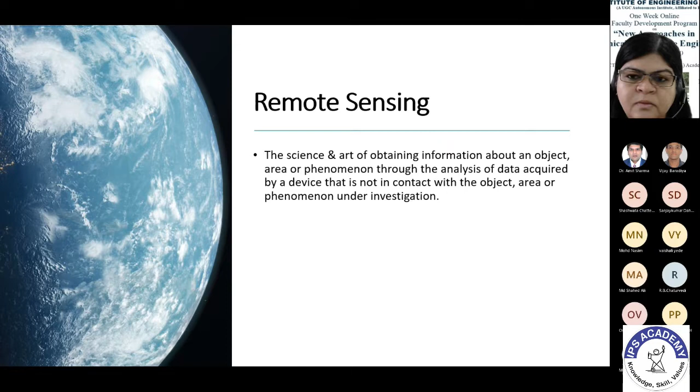Object, like some buildings of interest - the features we are working on. Area, like multiple features in a region, for example a city or an agricultural field. The third is phenomena, which is happening in real time, such as rainfall or some disaster. So you all hearing me and watching these slides - that is also a kind of remote sensing, right?

So now, why remote sensing? It enables us to get information like systematic data collection, information about three dimensions of real objects, repeatability and global coverage, and multiple purpose information. Systematic data - say I want to obtain information for some area, and I send 10 people to collect it.

So 10 people will have different sets of data and 10 different types of error. But with systematic data collection, that sort of error can be removed. Repeatability means taking information over a certain period of time. For global coverage - sometimes a disaster takes place and we are not in a position to physically go to that place, so remote sensing is very helpful there. The same data can also be utilized through different methods for people catering to different applications, so the same information can be used for different applications.

Now next we resort to the remote sensing process. What is the process? How are we able to get the data? First of all, we need to sense some target for which we want information, and we need a source of light, which is the sun, to illuminate it. So it can be the sun or some artificial source of energy. Then we need a sensor to collect and detect the data. So D is our sensor, which is a platform.

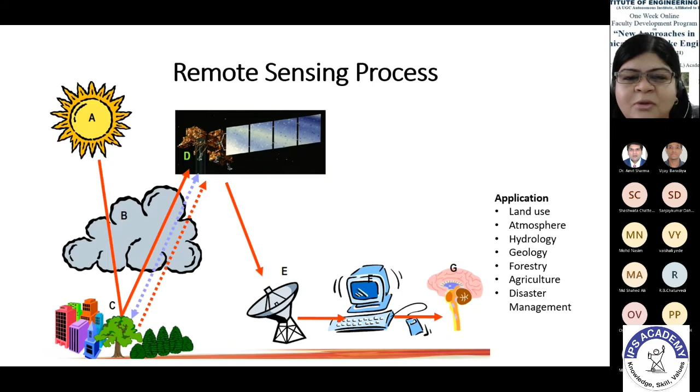Then comes the next term, which is GIS. So GIS, we are all using it. It is a computer-based tool to capture, store, update, analyze, and display all forms of geographically referenced information on Earth. This information is acquired for real life problems. Originally GIS was developed in Canada for farmland revival and development, and then later it was utilized for various other purposes.

So the most commonly used softwares to carry out this work are ArcGIS, which is a licensed software, and then we have QGIS, which is an open source software. So people can use it openly without having any key or access like that.

Then for GIS, we are going to have five basic components: hardware, software, data, methods, and people. So hardware, that is a robust computer system, is a must for smoothly performing all the operations in GIS, and this is the basic requirement to start with the working.

Then we require a software like ArcGIS and QGIS for storing, processing, analyzing, and displaying the data. Then for the data, the final GIS output largely depends upon its availability and quality. The input data for GIS may be in the form of satellite images, scanned maps, survey data, historical records, etc.

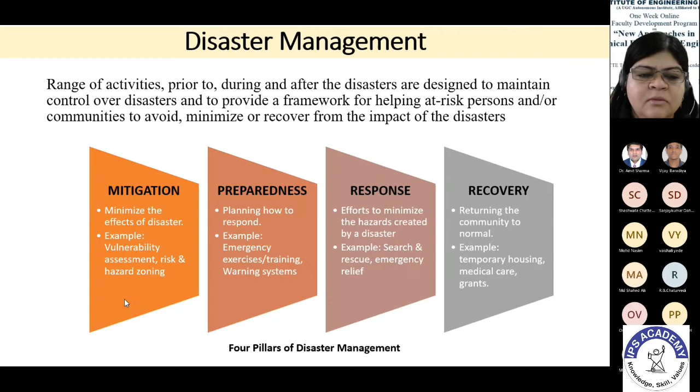Then the fourth pillar is recovery, that is restoring the affected area to its original state, for example by providing temporary housing, medical care, and grants to the people affected by the disaster.

So for disaster management, we require space technology, which provides a platform for observation and information. This information is very useful for taking proper decisions in the event of a disaster, and not just observation, which is more or less spatial, but it also provides satellite-based location, popularly known as GPS. GPS is nothing but a satellite-based location service provided by a group of satellites launched by the US.

Then the third aspect is communication, which in the event of disaster, terrestrial communications are affected first. So in that case, to understand the extent and location of disaster, as well as getting ground-based information for prioritization, communication during the period of disaster is mostly provided by this space technology.

In a disaster cycle, as we have already discussed the four pillars of disaster management, there is a cycle in disaster management. First, information and observation is provided by satellite-based information, which observes the Earth, and satellite-based communication from the ground, to assess the extent of the disaster and the damage caused.

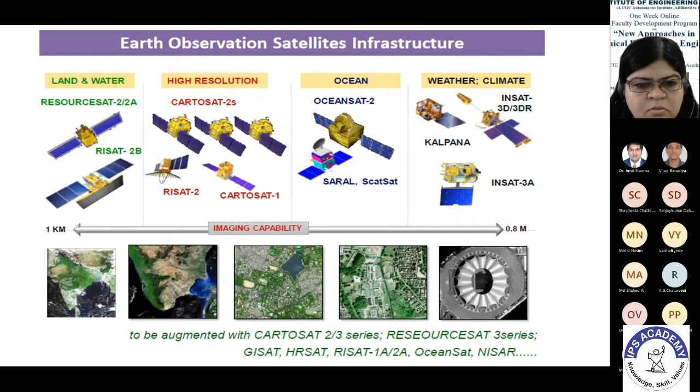Now, for information assessment and data collection, we have various portals in India which provide datasets in the form of satellite imagery or maps. We have Bhuvan, NDEM, MOSDAC, and IMD.

Bhuvan allows us to explore a set of map-based content prepared by ISRO. Then NDEM, that is the National Database for Emergency Management of Disaster. It is a portal provided by ISRO along with central and state departments, and it provides products and services for better management of disaster.

Then MOSDAC is the Meteorological and Oceanographic Satellite Data Archival Center, and it is the data repository for missions of ISRO and the Government of India dealing with meteorology, oceanography and tropical water cycles. Then IMD, we are all aware of, constantly looking at the weather and temperature every day. It's a very basic site that everyone follows, which is the agency of the Ministry of Earth Sciences and Government of India, responsible for weather forecasting.

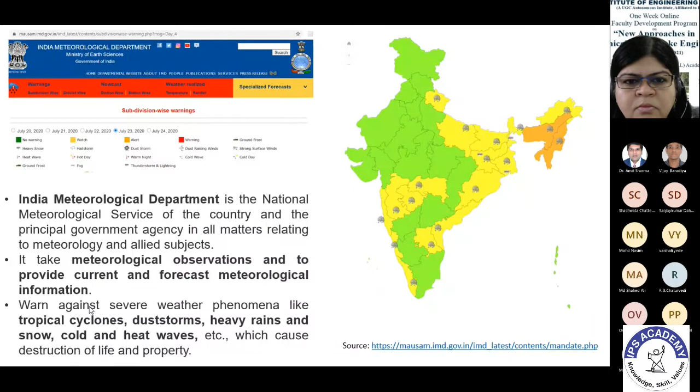This is the IMD website of India, for current and forecasting meteorological information. This is the cyclone warning and cyclone forecasting, the early warning system by IMD. We have tackled various cyclone problems like Amphan and Nisarga through this technology.

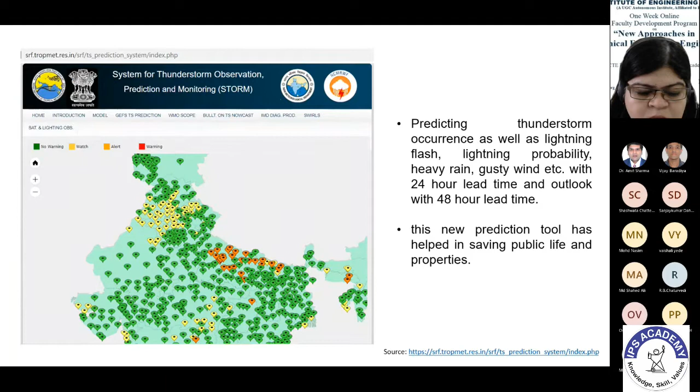Then we have STORM, which is the system of thunderstorm observation, predicting and monitoring for lightning, heavy rain, gusty winds, etc., within a 24-hour lead time. Then for drought we have DEWS.

And for forest fire, which is very prominent in hilly regions, we have a forest fire reporting mobile app developed by ISRO, which will prove to be an effective tool for forest management, where satellites validate forest fire occurrence and location accurately, helping the department take appropriate action in controlling the fires.

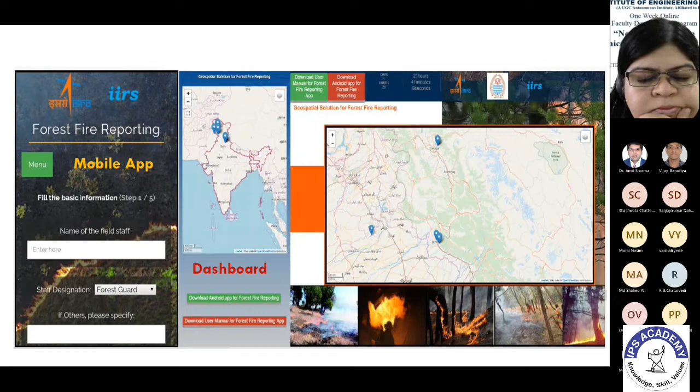Then we are all aware of drones. Drones are also being used for collecting information and monitoring, for example in containment zones during the times of COVID. So these are some examples of the application of remote sensing and GIS in managing disaster.

So, concluding the role of remote sensing and GIS in disaster management, the first point is hazard mapping. Hazard maps can be created for various natural and man-made hazards like floods, earthquakes, cyclones, forest fires, etc.

Then it can map the affected locations and compare the data to historical information to assess the overall damage. While remote sensing aids in map preparation, GIS can be used for the storage of digitized maps, their visualization and analysis. It helps in all the stages of disaster management, as we have seen with some examples, effectively improving the workflow in all phases of disaster management.

So this was all for the various tools and techniques we are using for disaster management. Next, we are going to come upon the topic of landslides. Landslide is one of the most damaging and life-threatening hazards which affects most of the hilly regions worldwide.

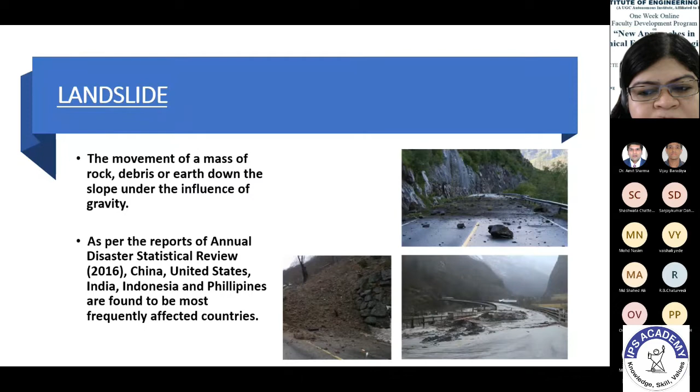According to a study conducted by Froude and Petley, from 2004 to 16, there are individual landslide events you can see, and from that study it was concluded that the majority of landslides were triggered by rainfall, that is 79%, of which India is contributing 16% in the global dataset. You can see that in India there are so many landslide events that have happened from 2004 to 2016.

From the study it was also concluded that 28% is construction-triggered landslide events, about 12% is landslide events triggered by mining, and 30% of landslide events are due to construction activities along the road. So construction activities most prominently trigger landslides, whether it is the construction of roads, residential buildings, or other types of construction.

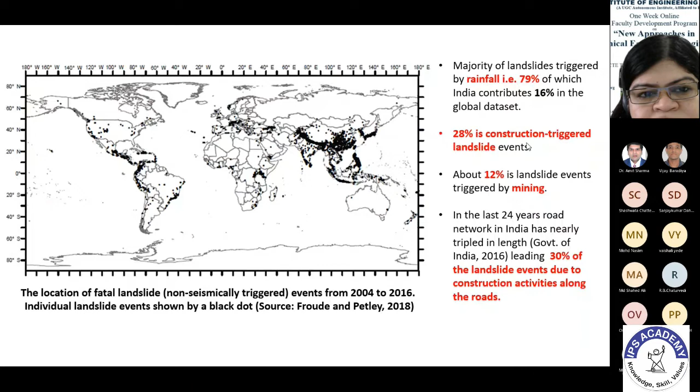This landslide case study has been presented on which two objectives have been fulfilled: the study of landslide susceptibility zonation and the study of physical vulnerability. The study area on which the study has been conducted is Chamoli district, which is in the Gopeshwar township, and Chamoli is the district headquarters.

Gopeshwar Township has been the district headquarters of Chamoli since 1960. Since it shares the international boundary with China, it is important from a strategic point of view.

This is the map of Gopeshwar Township, obtained from Nagar Palika Parishad Chamoli 2016. According to the municipality, Gopeshwar Township has been divided into 11 different wards.

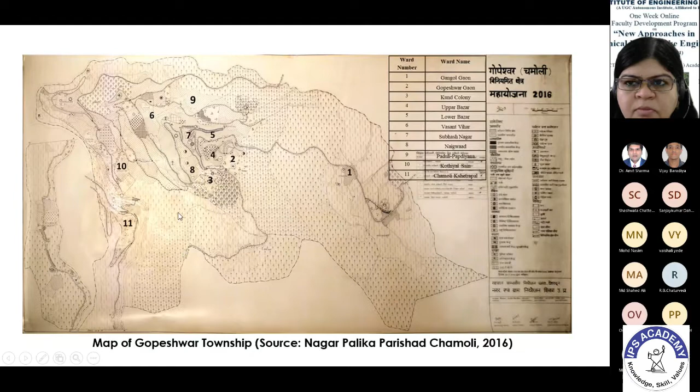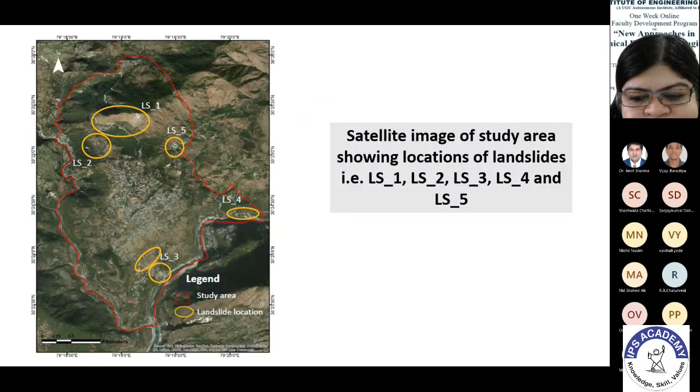This is the satellite image of the study area, which has been collected from GIS, and from there we observed that there are 5 landslides affecting the area. We have given each one a notation, like LS1, 2, 3, 4, and 5. So in the study area we are affected by these 5 landslides.

This is a field comparison of images acquired from the field survey, on the left, and the base map ArcGIS, on the right. First we collected data sitting in our offices from Google Earth images and ArcGIS maps.

We identified these landslides, and then for ground truthing we went to the field where we found that these things are true. So this is just a comparison to show the data acquired plus the ground truth condition.

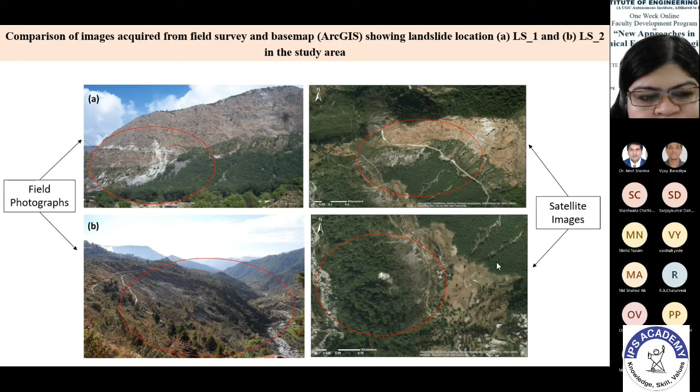So the first study we did was the landslide susceptibility zonation. It is done in order to acquire prior information on the probability of landslide occurrence in hilly areas, and generating the landslide susceptibility zonation maps, which is necessary. This is basically the first objective in all landslide studies. Landslide susceptibility maps divide the landslide prone regions into various levels of susceptibility zones.

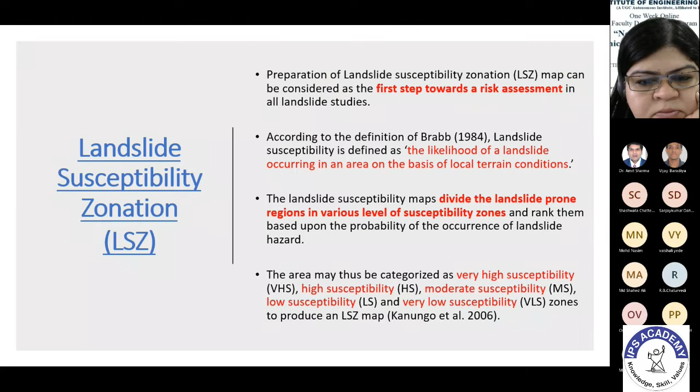Susceptibility is the likelihood of landslide occurring in an area based on local terrain conditions. While dividing these areas into different categories, like very high susceptibility, moderate susceptibility, low and very low susceptibility, we divide the regions to know how susceptible, how prone the region is to landslide.

There are different methods to carry out this landslide approach, broadly classified as qualitative and quantitative. Under qualitative, there are different methods like distribution analysis, geomorphic analysis, map combination. And quantitative, which most people are using now, like AHP, fuzzy, machine learning, ANN, information value, weighted overlay. These are all the quantitative methods.

A lot of study has already been carried out on landslide. So in my study, this is the flow diagram of the steps which have been followed for the landslide susceptibility zonation, and in this, information value approach has been used.

For the input data, I have taken data from published literature, field data, Cartodem, which is the satellite image, Google Earth, base map imagery, and ArcMap. Then from these input data, the different thematic data layers corresponding to different factors for landslide occurrence have been prepared using GIS and field data, like slope, aspect, drainage buffer, TWI. After collection of this data, the data is being integrated using the information value technique.

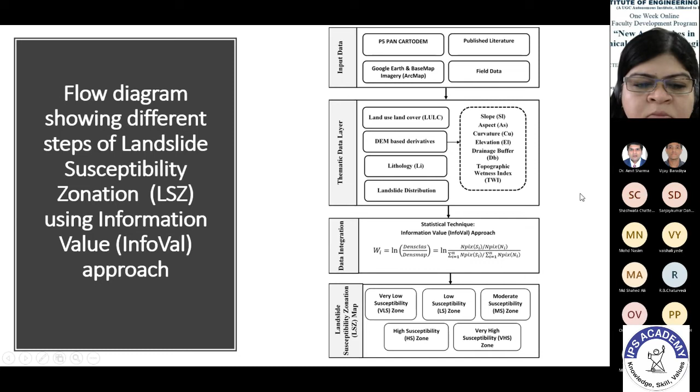Then we have slope, which is the angle formed between any part of the earth's surface and the horizontal datum. It was observed that the slope category of 25 to 35 degrees has the highest incidence of landslide.

Then we have the aspect layer, which is the direction of maximum slope of any location on the earth's surface, and it is related to the distribution and density of vegetation on the mountainous slope. In this study, it was observed that the southwest aspect category had the higher percentage of landslide occurrence.

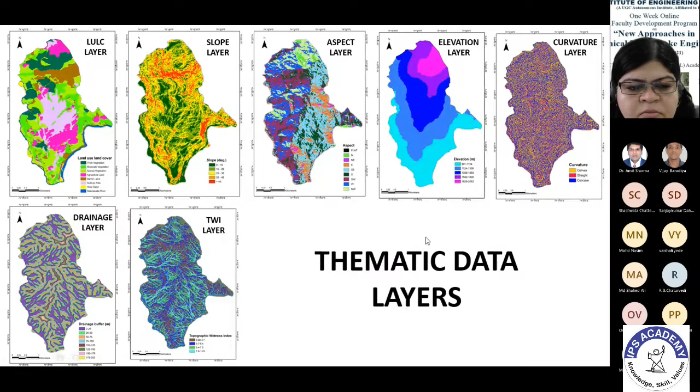This layer is prepared using GIS, and all the layers have been overlaid and numerically added, and the success rate curve has been presented here.

This is the success rate curve, defined as the percentage of landslide occurrence in any susceptible zone. Five representative factors are shown, at which success rate curves have been prepared. For m equal to 1, the best success rate curve was achieved, and for the first 10% area in the very high susceptible zone, m equal to 1 has the highest success rate, as I already told you.

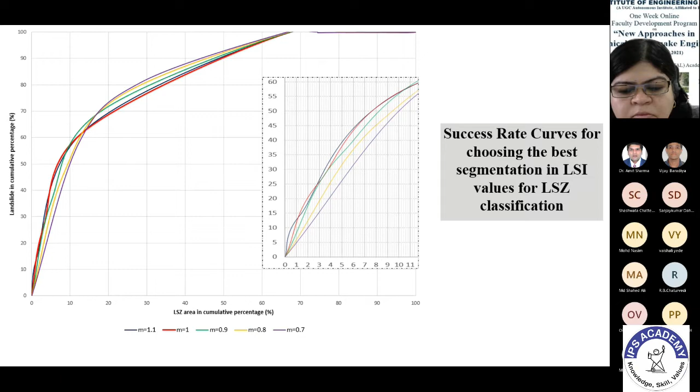The area under the curve is achieved graphically. For m equal to 1, the success rate is 97.6%. So we have prepared this landslide susceptibility zonation map at success for m equal to 1.

This is the final LSZ map, classified into 5 different layers: very low, low, moderate, high, and very high susceptibility. Visual inspection of the LSZ map suggests that all 5 zones are distributed all over the study area, and this shows the different percentages of landslides.

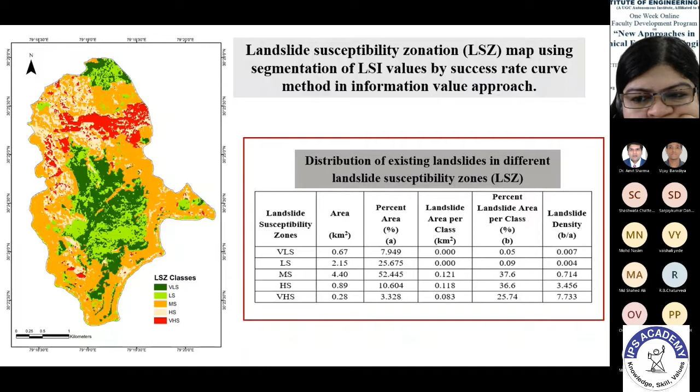It can be stated that 13.9% of high and very high susceptible areas together contain 62.34% of the existing landslide areas. So in high and very high susceptible areas, we have approximately 62% of the landslides. This is the summary which I have already discussed.

Next we have physical vulnerability. First we need to know what vulnerability is.

From a natural and engineering science perspective, vulnerability is defined as the degree of loss in terms of the percentage of structural damage to a given element or set of elements subjected to a landslide event of a given type and intensity. It is expressed on a scale of 0 to 1, where 0 denotes no loss and 1 denotes total loss.

As per UNDP, the United Nations Development Program, 2004, vulnerability has been classified into 4 categories: physical vulnerability, environmental vulnerability, social vulnerability, and economic vulnerability.

Physical vulnerability is the loss due to damage of physical infrastructure and buildings, which we have conducted in this study. Environmental vulnerability is the loss of natural resources and damage like water, land, etc. Social vulnerability is the loss of population and social structure. Economic vulnerability is the effect on the economic condition.

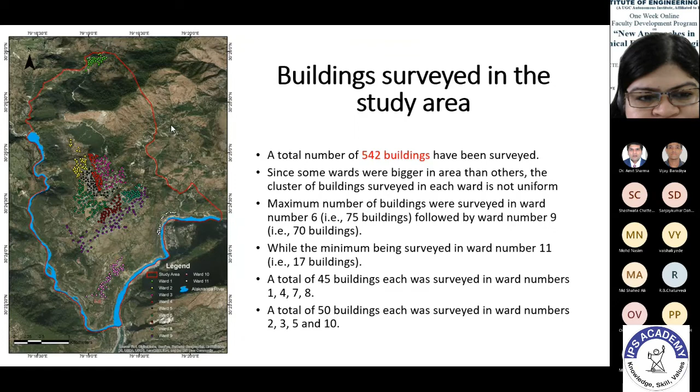We have categorized each aspect into different categories, like surrounding wall as strong, high wall, medium, or low. Then structural typology - stone masonry, reinforced, or mixed kind of structure. Then roof design type, number of floors, and vertical configuration - whether the building is regular or irregular. Then horizontal configuration, again with regularity or irregularity.

Then the presence of windows and doors, which should be greater than or equal to 1 meter, as per the Indian code. Then distance between two houses, building position from steep slope - whether it is less than 10 meters, greater than 10 meters, or on the steep slope.

Then the surrounding vegetation - barren, cultivated, or forest - and the quality of construction, like bulging of walls, spalling of concrete, and whether the reinforcement is exposed or there is honeycombing in the structure.

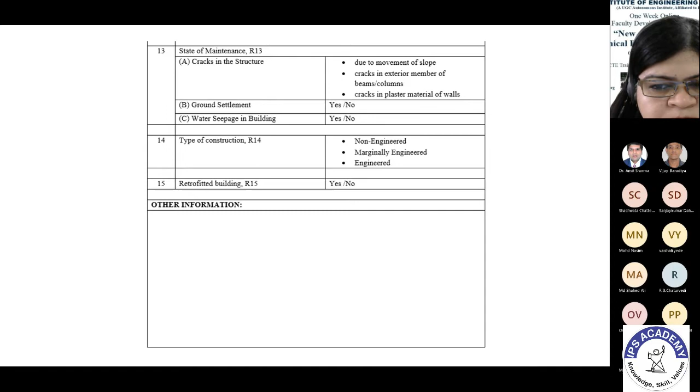Then other indicators are cracks in the structure due to movement of slope, ground settlement - whether it is present or not, water seepage present in the building or not, type of construction - whether engineered, non-engineered, or marginally engineered - and the last one is retrofitted building, meaning once they were affected by some disaster like earthquake or landslide, and retrofitting has been done on that building. So the 15th indicator is the retrofitting.

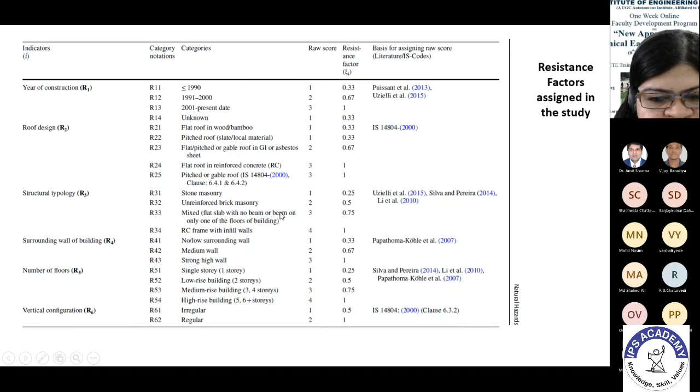All these indicators have been assigned a resistance score, resistance rating. These are all the different resistance factors assigned to all the indicators, based on either literature or using the Indian Standard Code like IS 14804-2000. So these indicators have been assigned factors.

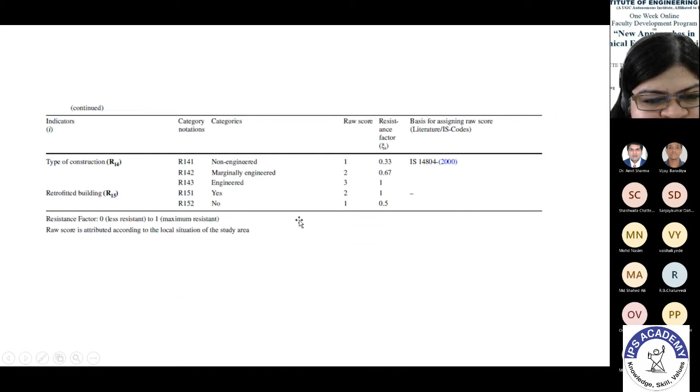After collection of this data in the building vulnerability assessment form, these scores are assigned, and then calculated using this empirical formula, and categorized as low, moderate...

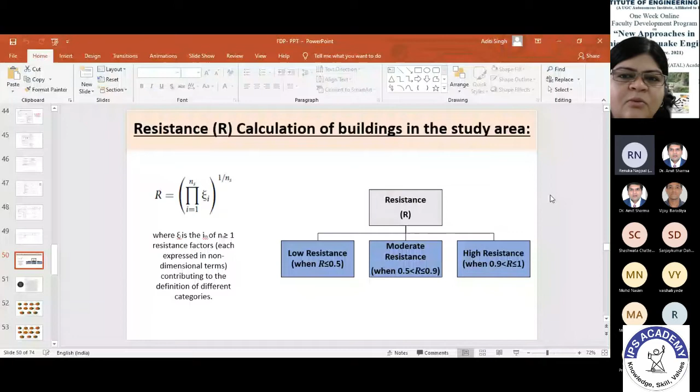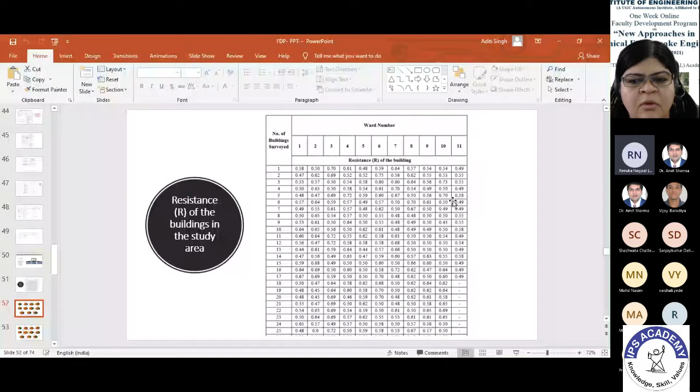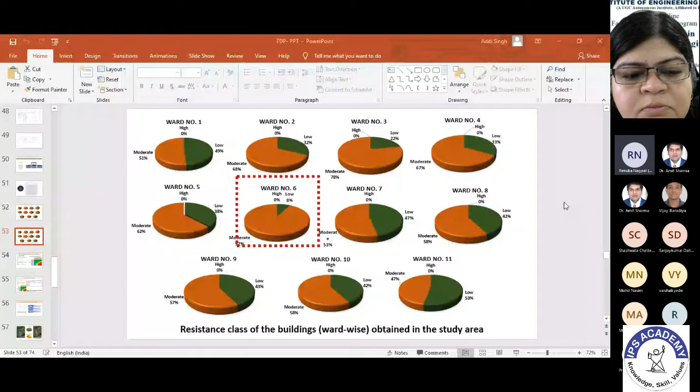Then, the overview of the methodology for scenario-based debris flow intensity. We are going to have the intensity assessment. For Indian Himalayas, landslide intensity has not been reported so far. Therefore, in this study, a methodology has been proposed to assess the landslide intensity.

Scenario-based intensity is assessed based on the debris flow type of potential failure, and intensity has been calculated using the landslide velocity scale provided by Cruden and Varnes, and landslide volume for Indian Himalayas given by Sarkar sir. So using volume and velocity, we have developed a matrix to find out the intensity.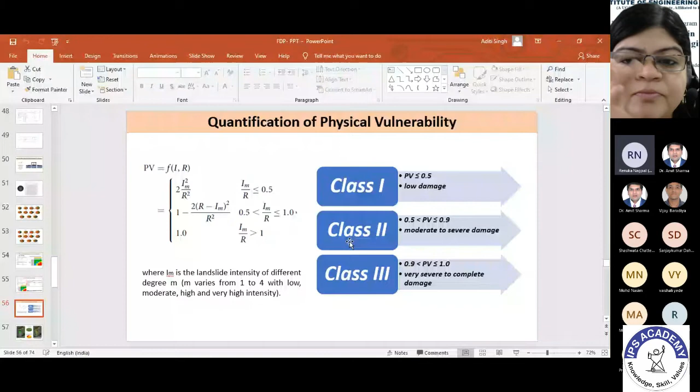So for scenario-based vulnerability, we found that when exposed to low intensity, all the buildings are safe. Then for physical vulnerability at moderate intensity, we found that 64% of buildings belong to class 2 and 36% of buildings belong to class 3.

Then when we exposed the buildings to high and very high intensity, what we found is all the buildings belong to physical vulnerability class 3 - all the buildings are in the mode of very severe to complete damage. That means this study area cannot sustain this much intensity. So through this, we consider this to be a landslide disaster, and we will be severely affected by landslides of very high and high intensity.

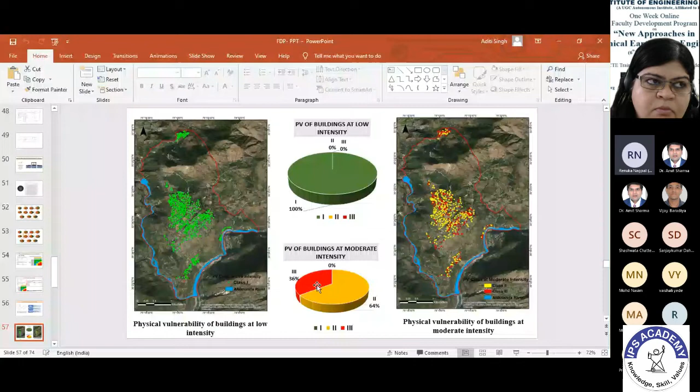So this was for the scenario-based intensity. Now talking about the site-specific vulnerability, we have focused on a single landslide which is affected by debris flow. This is the field photograph, and this is the Google Earth image shown in blue.

Here the lines you can see are the drainage pattern when there is rainfall. This is the drainage zone being followed, and all this is going to the Alaknanda River, which is the adjoining river of this township. This is the Google Earth image, as you can see.

This again is the landslide, this is the Alaknanda River, and these are the different buildings which have been constructed near the landslide.

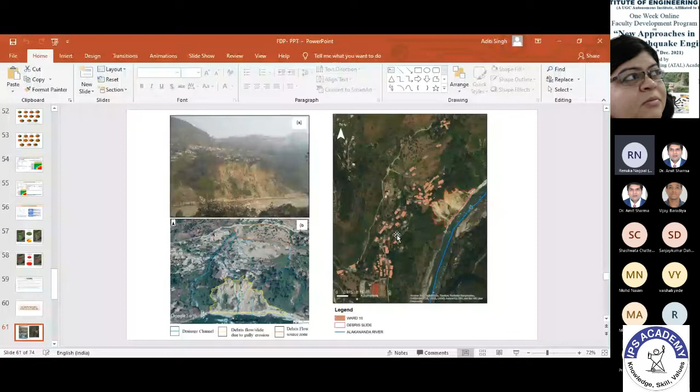So, a comparison of this image has been presented through Google Earth. On 28th May you can see there is no landslide here. On 25th Feb, a small bit of landslide is visible, with dense vegetation here. Then in 2014 and in 2017, again there is sparse vegetation and more population.

This is because of the 2013 flash floods which happened. So this triggered it - on 28th May there was no flash flood, and after that the flash flood came, the Kedarnath flash flood, and this was triggered, as you can see.

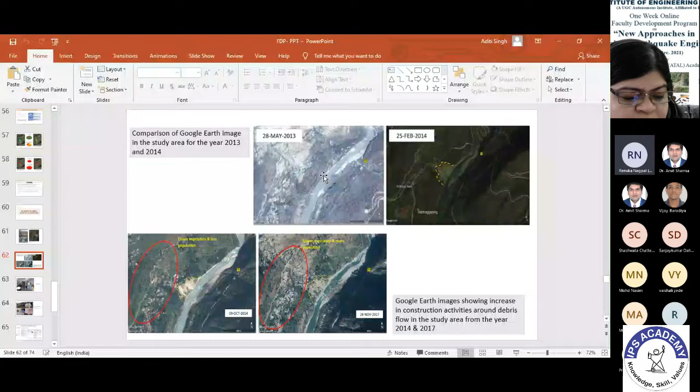So stability is not there, and this portion of the ground is unstable, and it is slowly moving down to the Alaknanda River. So for this, we have calculated the velocity.

Velocity was calculated using the area and the thickness of the landslide, and using an empirical formula. Using that we have used this matrix, and intensity was given.

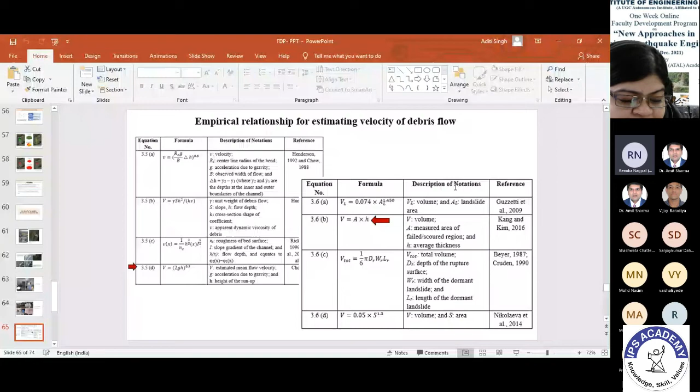Then this you can see the field photograph. This is the landslide. Another adjoining landslide above that is also being triggered, and these are the different buildings which are vulnerable.

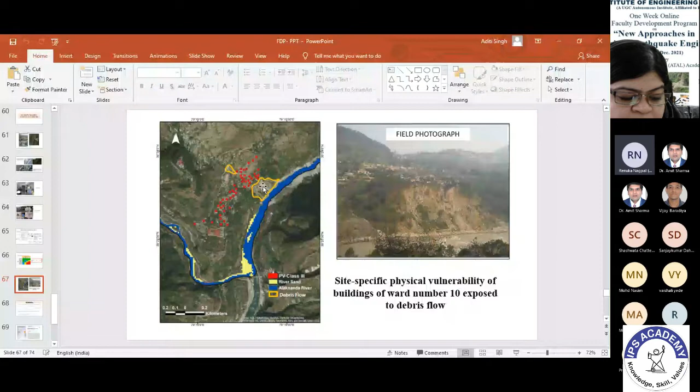From this, we can conclude that one of the major advantages of the methodology is its flexibility. The practical experience achieved through the case study shows that the methodology is user-friendly and can be directly implemented with the knowledge on landslide intensity and resistance ability of individual buildings in the area. Even if the data on landslide intensity is not available, the vulnerability of the building can still be assessed.

Such assessment can be extensively used by engineers and scientists to facilitate appropriate protective measures to both the buildings and the landslides, to increase their resistance and decrease the intensity respectively in a particular area.

This will help buildings and also property, and such assessment will help with construction guidelines. It will help in preparing construction guidelines specific to a particular region, which are presently lacking in the country.

So these are the different publications related to this work. One is in Environment, Development and Sustainability, with the title 'An Integrated Approach for Landslide Susceptibility, Vulnerability and Risk Assessment of Building Infrastructures in Hilly Regions of India.'

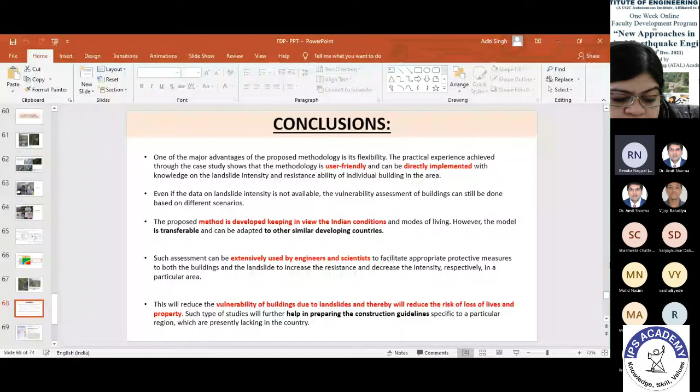The first overview of this paper on recent developments was presented in WLF, World Landslide Forum. Then one paper is related to the site-specific vulnerability assessment of buildings exposed to debris flow.

So these are all the different publications which are related to this work. That is all from my end. Thank you so much.

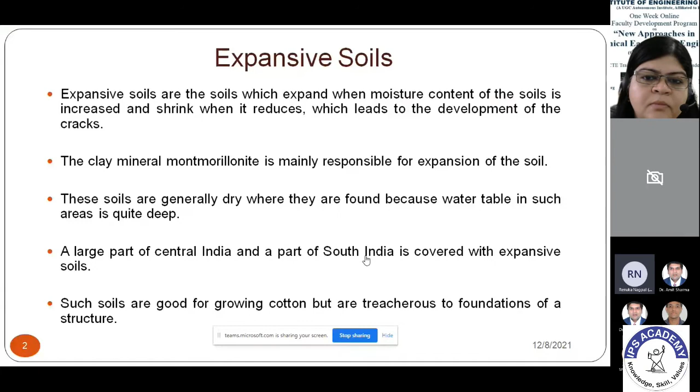We cannot say this soil is always a problem-causing one. For growing cotton, these soils have good possibility, and generally in these parts of India we grow cotton. But these are very harmful, or precarious, for the foundation of a structure. As you can see, this is one of the expansive soils found in the central region of India.

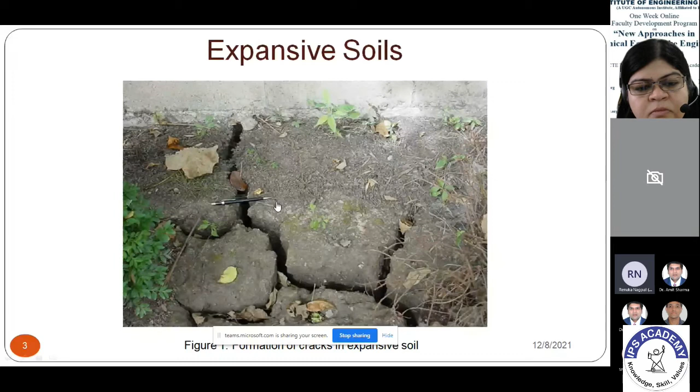There is a pen shown for demonstration purpose. As you can see, when these soils get dry, the pen shows the cracks in such soils. The width of the crack can go up to 10 to 15 centimeters - it can go as high as 15 centimeters, which is quite a large number.

The depth of this crack can go up to approximately 0.5 meters to 2 meters as well. So you can imagine, if any foundation is laid on such kind of expansive soil, and cracks appear in this type of soil, that building will lead to cracks or can also collapse because it will lose its shear strength. The soil will lose its strength, and this will ultimately lead to deformation or damages to the building.

So there is an active zone we talk about in these kinds of expansive soils. The active zone is the zone where, when moisture enters this kind of soil, there is a periodic change which happens.

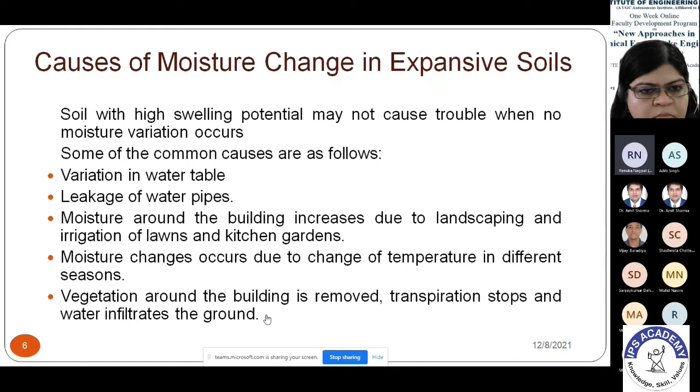So let us discuss, if we have already made a building on this type of soil, what can happen in that case?

If proper measures are not taken while construction of the building, meaning soil modification or other things have not been taken care of, then expansive soil is there. When water seeps into the soil, that will cause the expansion of the soil, and it will try to push the floor or slab which is laid under. That will ultimately lead to cracking.

As you can see in this picture, this is a foundation that we have made, but there is a wall which was constructed on top of this foundation. When water is added in such soils, the soil tries to expand, and while expanding, the uplift load was applied on the floor, which leads to deformation, or you can say cracking in the wall. Ultimately the floor will move in the upward direction, and this will lead to cracks in the walls.

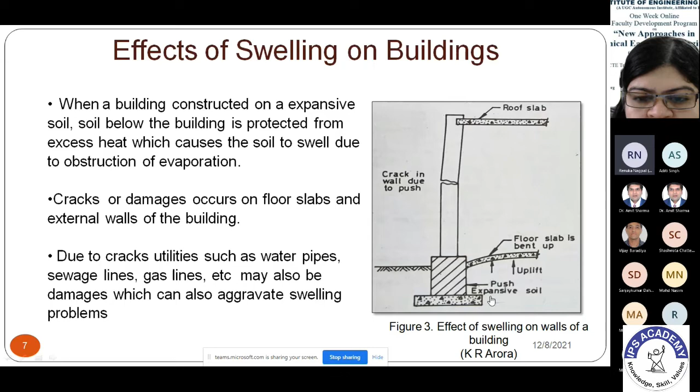So one of the popularly known expansive soils is black cotton soil. In India, it is found in the Chhattisgarh region or Madhya Pradesh region, mostly Madhya Pradesh and Maharashtra. These soils have the Montmorillonite mineral, which causes such expansion of the soils.

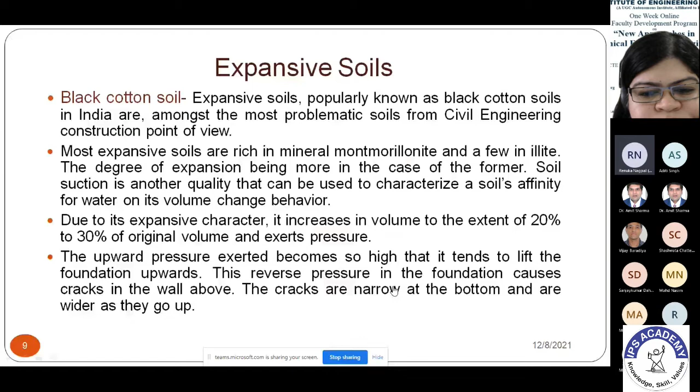So ultimately, as we have discussed, these soils are basically sticky plastic clays which are highly expansive and derived either from residual weathering of volcanic rocks or weathering of fine-grained transported soil particles, which are found in valleys and river banks. Obviously, these soils have great affinity towards moisture and are characterized by shrinking and swelling.

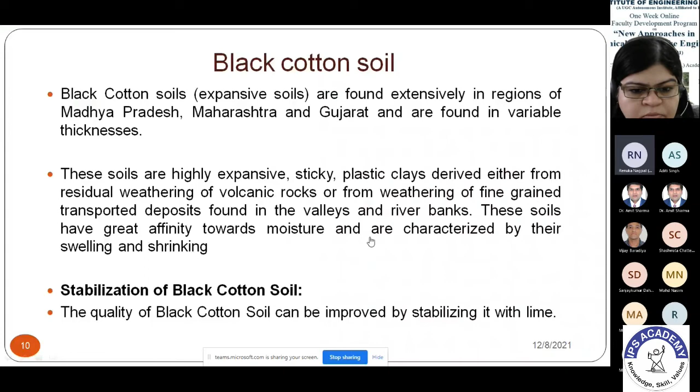Next, we are going to discuss the preventive measures for expansive soil. So what happens if we are having expansive soil and want to make a structure on such soil? First of all, we can go for the replacement of the expansive soil. But as you can see, in such regions there is plenty of expansive soil available, but there can be scarcity of granular soil or other soils which we want to use in that area. So it can sometimes be uneconomical if we go for a larger depth. It will be economical if we go for a small depth only, and otherwise we have to take other measures.

So if the soil is at shallow depth, we have to remove it and replace this soil with granular soil or any other kind of soil which does not show shrinkage or swelling properties. But remember, it is always uneconomical to replace the whole soil. If we are making a superstructure like a 20-story building, we cannot just remove the top 3-4 feet of this expansive soil. We have to go in the deeper direction. So in that case, other preventive measures are also taken, which we will discuss in the further slides.

Another method is modification of the expansive soil, so stabilization of soil is there. Stabilization means adding lime. What we do is add lime into the soil and mix it properly, and then lay this type of soil. Because lime has cementitious properties and binding properties, it will not allow the soil to shrink or expand as it would without lime. So this method is known as stabilization of soil using lime.

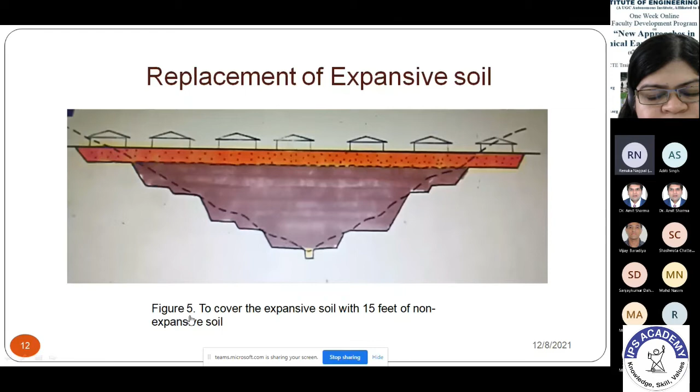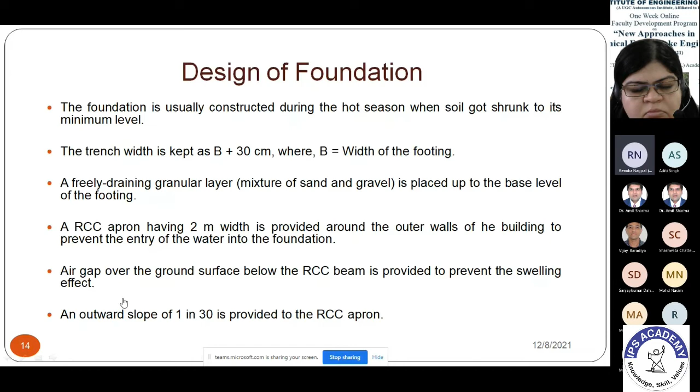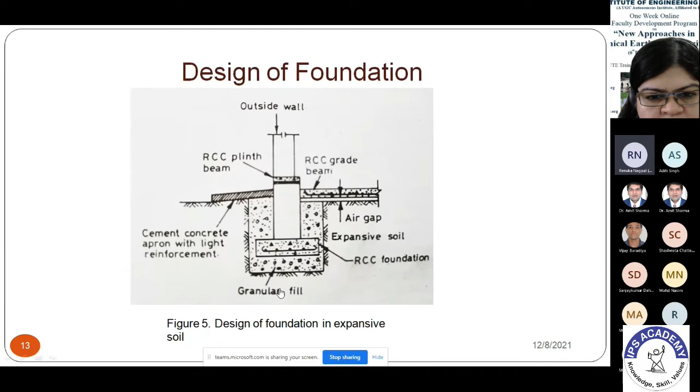So RCC apron having 2 meter width is provided on the outer wall of the building to prevent the entry of water into the foundation. An air gap over the ground surface below the RCC beam is also provided to prevent the swelling effect. We provide a slope of 1 in 30, so that in any rainy season, the slope will lead the water away from this side, and it will not go beneath this foundation. So this is the reason we also provide an outward slope in the RCC apron.

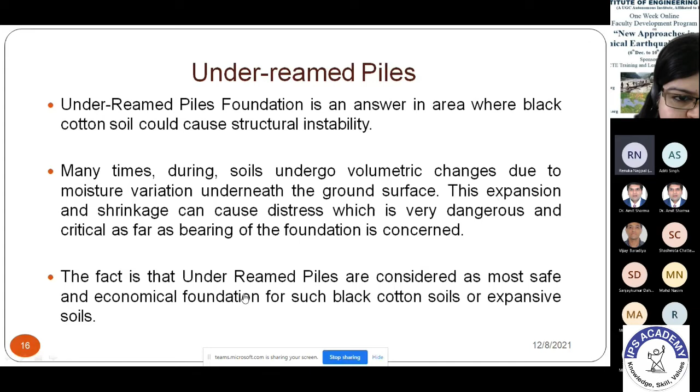First we make a bore, and using the auger we remove the expansive or black cotton soil which is inside. As the auger rotates, it loosens the soil and also removes it. Then we insert the reinforcement and provide the concrete layer.

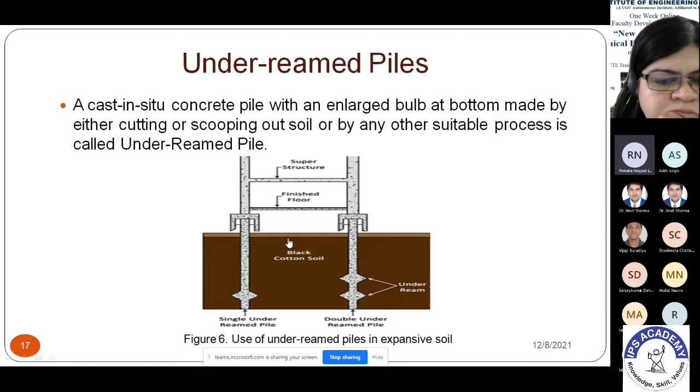There are some provisions and different criteria for using under-reamed piles. As you can see, this picture is taken from the IS code. It is written that we provide a bulb, and the diameter of the bulb is actually 2.5 times the pile diameter, B. There is reinforcement which is already lowered down, and then concreting and addition of concrete occurs, and the pile is formed in that way.

There are a few things we have to note down. First is the diameter, how much will be the diameter of the bulb, and what is the center-to-center spacing we have to provide in these under-reamed piles from one bulb to another. It should be at least 1.5 times the diameter of the bulb itself.

Where we are going to provide the bulb, it is also specified that it should be at least 2B1, where B1 is the diameter of the bulb. For example, if it is 500 mm, we have to go for at least 2B1 minimum, or 1750 mm for expansive soils. These are the things we have to take care of.

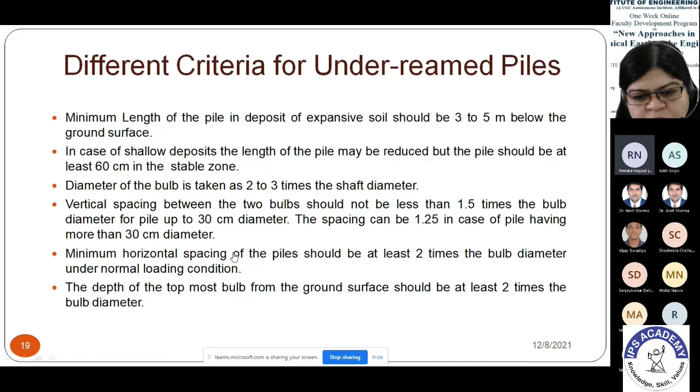So what are the uses of these piles? To avoid the undesirable effect of seasonal moisture changes in expansive soils, to reach hard strata, and to obtain adequate capacity against downward, uplift, and lateral loads and moments. Uplift load is due to swelling of the soil. Lateral load occurs sometimes in high-rise buildings due to the application of wind. When earthquakes occur, lateral forces are also applied. These under-reamed piles can easily take such loads when provided in any foundation.

So, to take the foundation below the scour level. If any building is prone to scouring, we can provide these piles so that the scour level effect can be avoided, and the foundation should be provided below the scour level. Under-reamed piles should be used under conditions where vibration and noise are caused during construction of the pile; this is to be avoided in such cases.

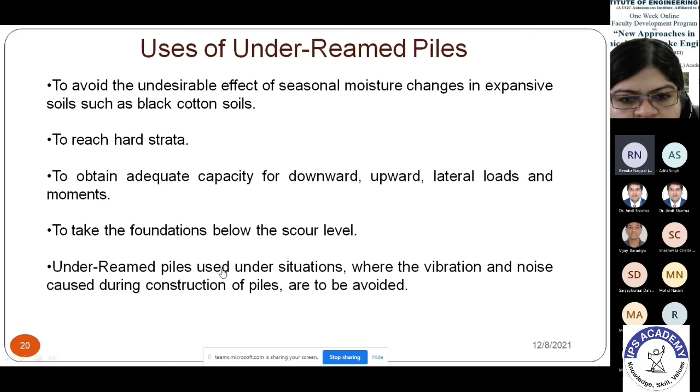So the first portion of the presentation is over, which was expansive soil. Now the second portion of our presentation is collapsible soils. So let us discuss something about collapsible soil. Please excuse me for a second.

Okay, so let's discuss collapsible soils. What are collapsible soils and where are they generally found?

According to Sultan 1969, collapsible soil is soil which undergoes an appreciable amount of volume change upon wetting. This soil does not have shrinking properties, but when we add water and it reaches saturation level, an appreciable amount of volume change occurs in this type of soil.

Either we fully saturate or wet the soil, or it happens by load application. Up to a particular point it can take load, but if we apply more load on these type of soils, a sudden collapse of the soil structure takes place. So there are two major reasons: saturation or wetting of the soil, and load application, or a combination of both.

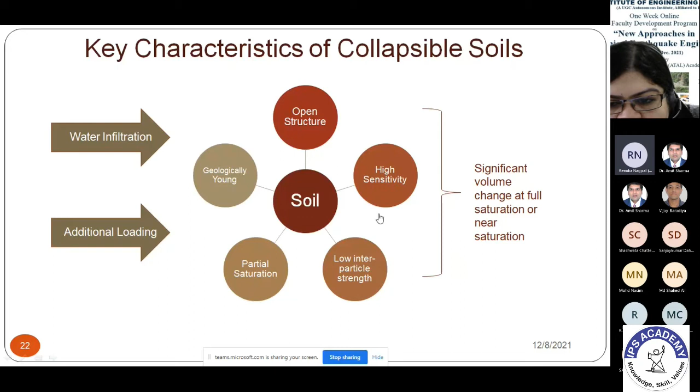There is significant volume change at full saturation or near saturation level. When it is fully saturated or any saturation level is reached, significant volume change will occur. This is the family of collapsible soil.

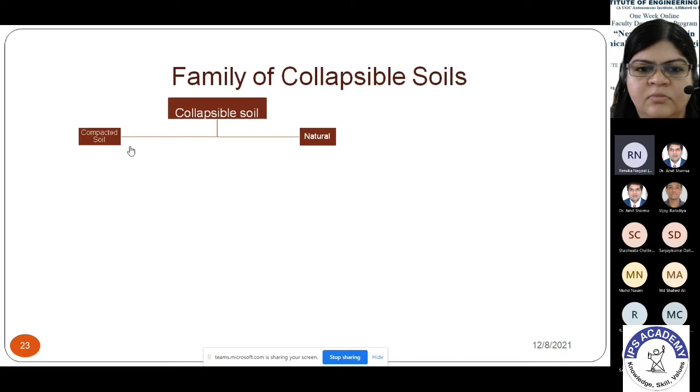We have to classify these collapsible soils. First is compacted soil, another is natural soil. We don't have any problem with compacted soil; it will be found only in glacier regions, so it will not get transported. The problem starts with natural soil.

Natural soil can be further classified into residual soil, sediments, and slide structures. Residual soils are formed by weathering and decomposition of rocks and are not transported from their original place, while sediments get transported from their natural state.

Slide structure is basically the sliding of the structure due to gravity force acting on it. These soils are formed due to the sliding of rock mass at the glacier level, where gravity action is the predominant factor.

Let us discuss sediments. They can be transported either by water or by air, and as just stated, major weathering occurs due to gravity action in this process.

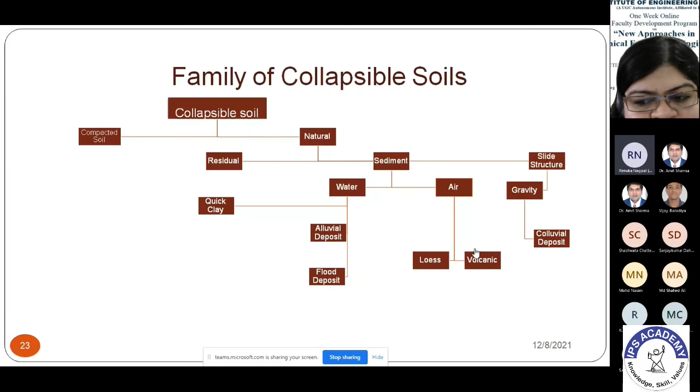Let us discuss alluvial soils. Alluvial type collapsible soils are mainly formed by flash floods or mud flows, which come from huge precipitation at irregular intervals. When this mud flow or debris flow occurs, these soils get transported and deposited in such areas.

These soils are loose and metastable. I'll discuss this metastable condition - it means the soil is actually in a stable condition for a small period of time, until we add water or apply any load on that type of soil. That state is known as the metastable state.

It is formed in a loose state, where from one soil particle to another there is actually a gap, so it is held together by binding bonds. We will discuss this in the upcoming slides.

Loose and metastable states are induced due to particles that are transported and deposited suddenly or locally. Alluvial deposits are poorly graded and may contain a considerable amount of clay, which plays an important role in binding these particles in the dry state.

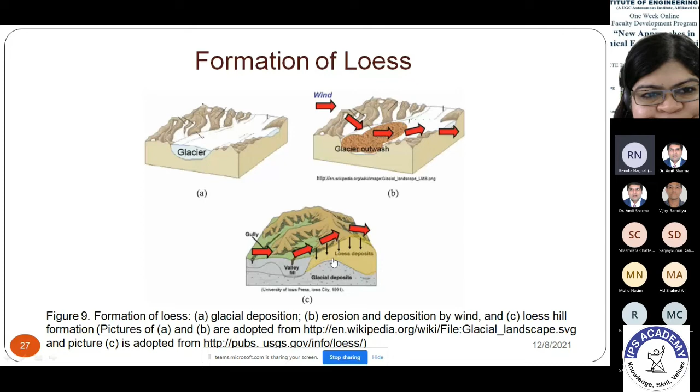So these soils are not just a type of soil that you can see in the deserts. It is actually forming a mountain of its own. I will show a picture of that in the upcoming slide.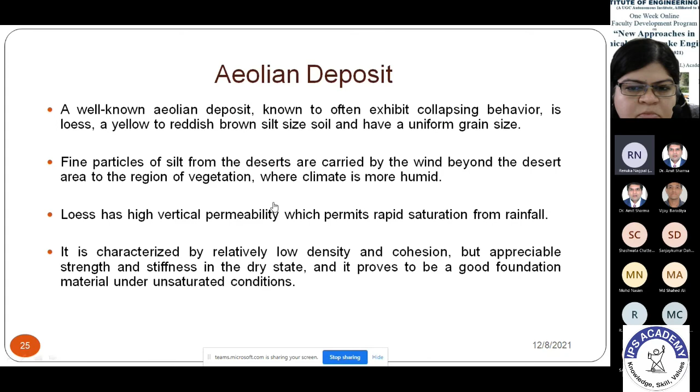So what happens in this case is loess, as discussed in the earlier slide. This basically is these soils when they get transported and form a mountain near the roots.

They are having pipes, meaning vertical channels. When we add water in these types of soils, what happens is because of their vertical pipes, as you can see here, vertical lines are there, which make them more permeable in the vertical direction compared to the horizontal direction. This is because of these vertical pipes, or vertical worm-like lines, at the roots of the vegetation.

So in that case, when water is added, when there is rainfall or any reason for water being added to these soils, because of the high permeability in the vertical direction, it goes down.

Goes down in quite less time. Obviously, silt or sand is a soil having high permeability, but this specifically Loess has high permeability in the vertical direction. This is a mountain of Loess which is formed, and it is transported through wind, got deposited, and naturally compaction happened, and after some time vegetation was there.

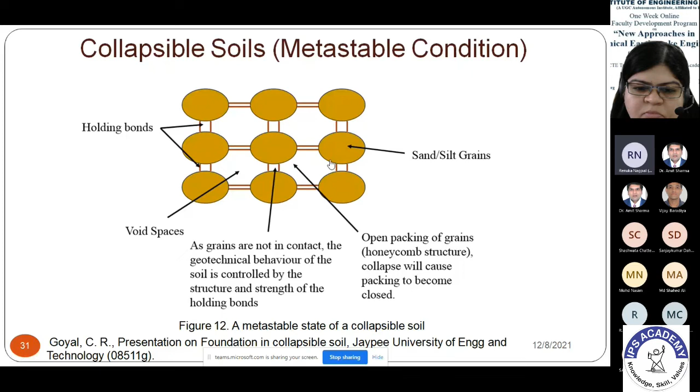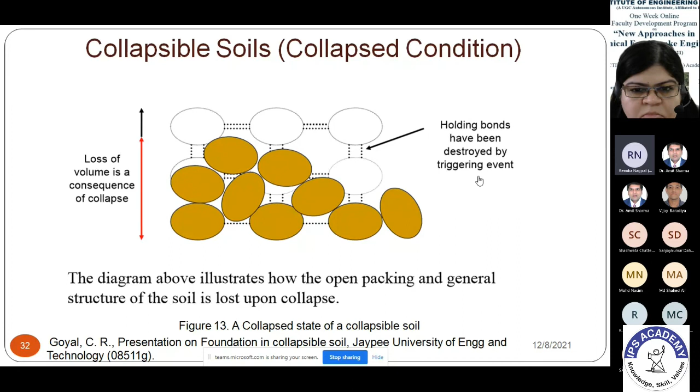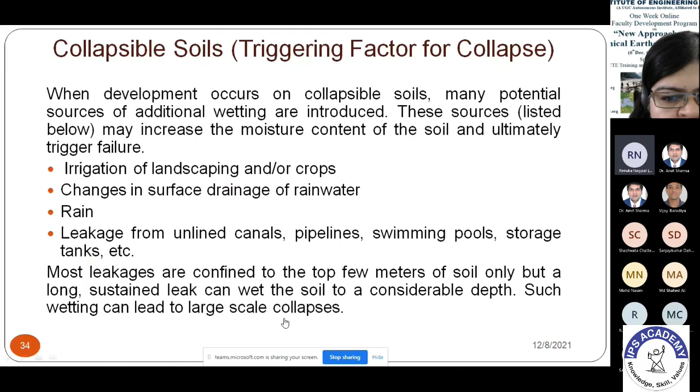Now let us see how we can determine the collapsibility of this soil. There is a formula: delta H by H, where delta H is the change in height upon collapse. This is determined with the help of the oedometer, or the simple consolidation test that we perform in our laboratory. With the help of that test, we can calculate the coefficient of collapsibility.

So the coefficient of collapsibility is delta H by H, which is change in height upon collapse divided by the original height. There is also another formula: delta E upon 1 plus E, where delta E is the change in void ratio upon collapse, and E refers to the void ratio prior to collapse.

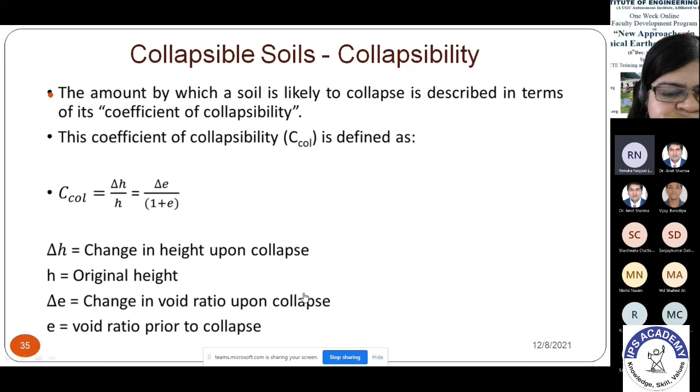If we calculate this coefficient of collapsibility and it is between 0 to 1, there is not much of a problem at all, so we can avoid that. If it is between 1 to 5, there is some trouble when we have to deal with it. If the range is between 5 to 10, we have to go for some measures. Similarly, 10 to 20 is severely troublesome, and if it is greater than 20, we either have to remove it or take strict measures to remedy the situation.

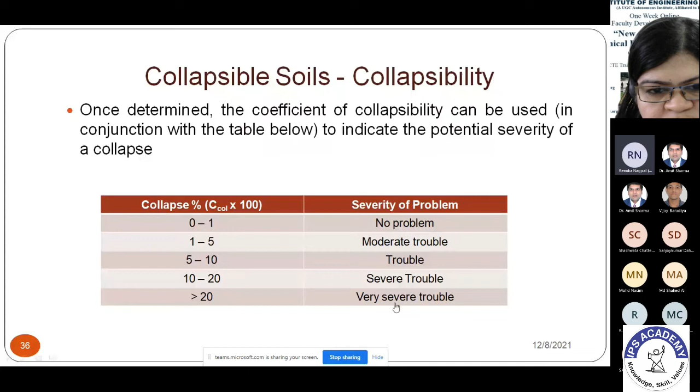So how can this be mitigated? There are basically structure considerations, site features, collapsible soil avoidance, and ground modification.

Structure consideration means residences are usually supported on shallow foundations. If these footings are lightly loaded, because the soil has low bearing capacity, we cannot provide a strip foundation or shallow foundation. In that case, we do not provide a strip foundation; we provide a mat type of foundation, which will cover a larger area compared to the strip foundation.

So in this case, when we have to build a residential area or any such areas, we have to provide a mat foundation, not the strip foundation as used in expansive soil. This is a bit different from that kind of soil.

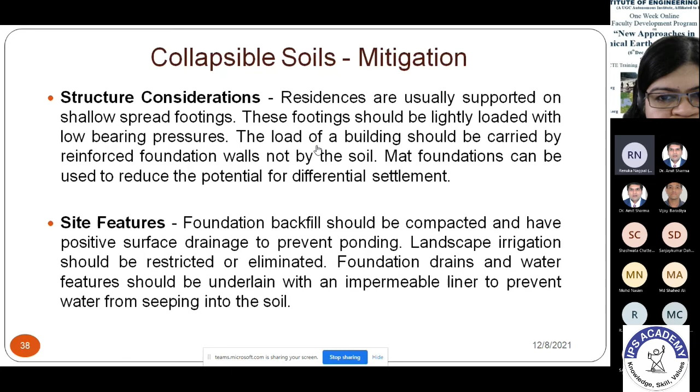Site features should include proper compaction of the soil, and landscape irrigation should be restricted or eliminated. Foundation drains and water features should be underlain with an impermeable liner to prevent water from seeping into the soil, as is clearly written.

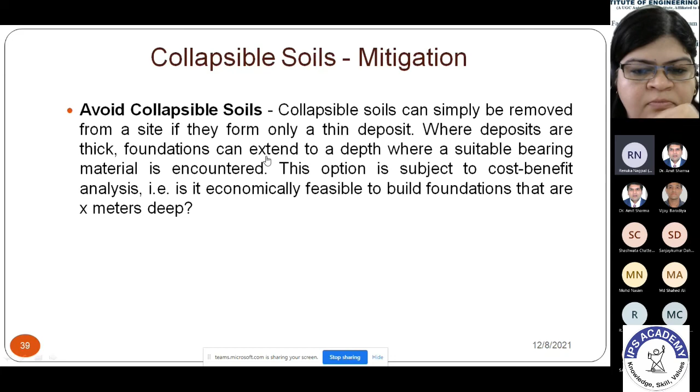The thing is, if we can avoid such soils, we should avoid them. But if there is a thin deposit, then we can remove that. However, if it is thick, then we have to go for other measures.

So how can we do ground modification in this case? Ground modifications can be used to prevent collapse from occurring, and they can also be used to induce the collapse prior to development. The following measures are to be taken on metastable soils that may be wet to a depth of 2 meters or less. The first one is pre-wetting of the soil, which is used when we have to build a foundation or any superstructure on such soils.

We should first pre-wet the soil. Pre-wetting will lead to the collapsing of the soil. After that, we can compact it using heavy rollers, and tamping can also be done, so that ultimately there will not be a problem for us in the future. So this is important: pre-wetting of the soil leads to the collapse of the soil, and in the longer period, it will not cause much problems.

But it will make our structure or any foundation on soil which is dry, and in any case water appears into that soil, seepage occurs, or any other things, that will lead to the collapsing of the structure after it is constructed. That is not admissible. So we should first pre-wet the soil, and then using the compactor or heavy rollers we can do the tamping.

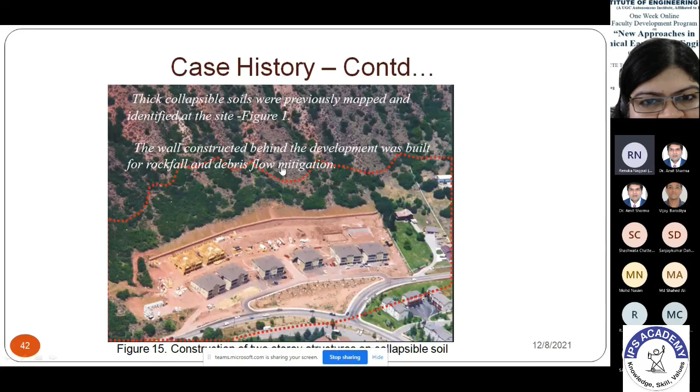It was constructed, and later on, in the rainy season, these buildings started showing problems - significant errors were made in the design, construction, grading and landscaping. One more problem was that the back of the units did not have proper drainage, and rain gutters were not provided. Rain gutters are normally provided on top of a building so that water can be collected and drained off easily, but these were absent from the roof line in these buildings.

We did not have any proper drainage. If there is no proper drainage system, the water will obviously go into the foundation and start causing problems. These units were built around 2003, and within 6 months of the first units being completed and sold, collapse of the soil was causing settlement of the back concrete wall foundations.

Let me show you the images of that same two-story building. These are the cracks that have appeared on the side of the doors, and sometimes at the side of the windows.

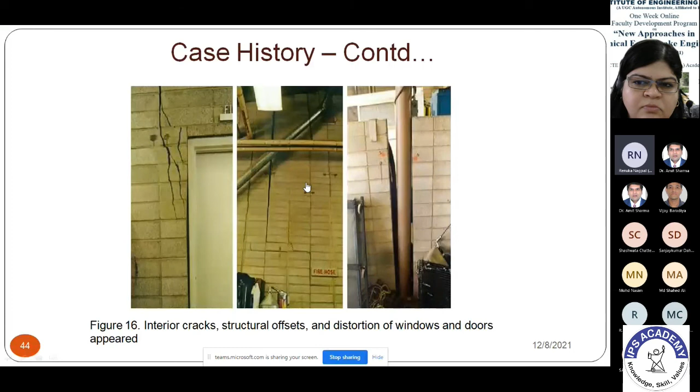Because of the absence of a proper drainage system, or absence of rain gutters, this leads to the development of cracks near the door as well as the windows. So interior cracks, structural offsets, and distortion of windows and doors appeared.

So what was actually finally done? From certain areas which collapsed during the addition of water or the seepage of water, compaction grouting was done in those areas to lift the settled areas of the building. That was the final decision taken by the developer, so that finally they had to do the compaction grouting.

Using compaction grouting, this cement slurry mixed with sand was added in the foundation, which ultimately lifted the settled areas, because in this case no expansion occurs. Instead, collapse of the soil occurs and the volume decreases, so we have to lift the settled area. Using this compaction grouting, they have lifted the settled areas.

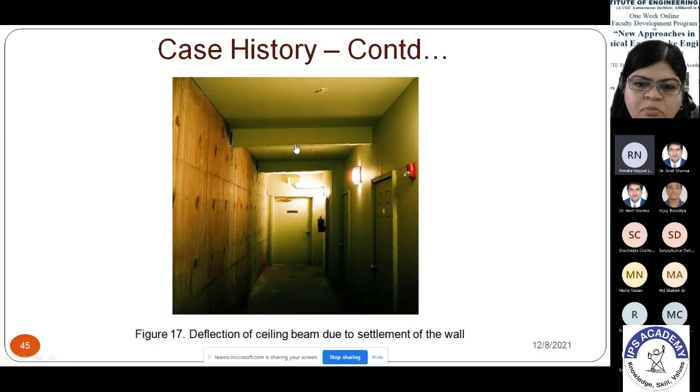This is one more picture. As you can see, inclination of the beam also occurred - deflection of the ceiling beam due to settlement of the wall. When the wall settled, this also got tilted, and the deflection can easily be seen in this building. So that was the case study.

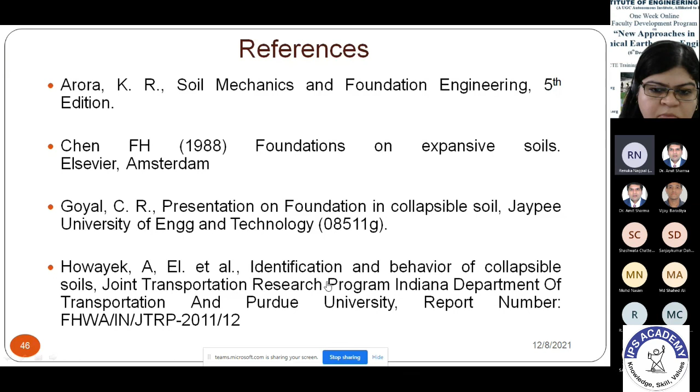Now, numerous case studies are available to us. These are the references I have used in this presentation: K.R. Arora's Soil Mechanics book, F.H. Chen 1988 Foundation on Expansive Soils, C.R. Goyal, and finally A. El Howayek et al. This was a joint research program specially done on these types of collapsible soils at Purdue University in the US. I have taken various references from there.